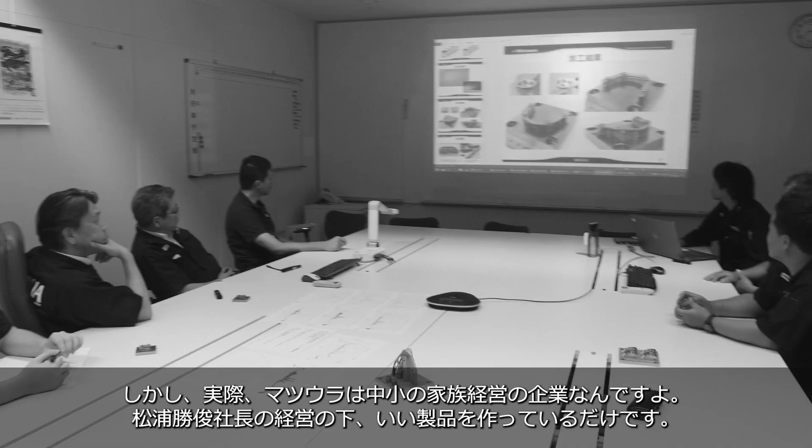We all aspire to have a nice car. Could I afford a 911? Could I afford an Aston Martin? Not wanting to sound arrogant, the Matsuura brand has this image, this market positioning. But the reality is we're a small family-run business by Mr. Matsuura, Katsutoshi Matsuura, that produces a good product. What it means is that people aspire potentially to own a Matsuura. It's quite humbling when a customer buys their first Matsuura and says, 'Never thought I'd ever be able to afford one.' Well, the thought and the true affordability are two different things.

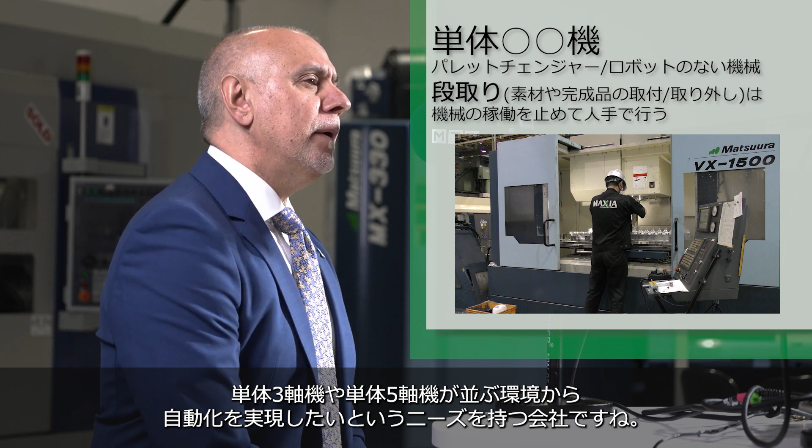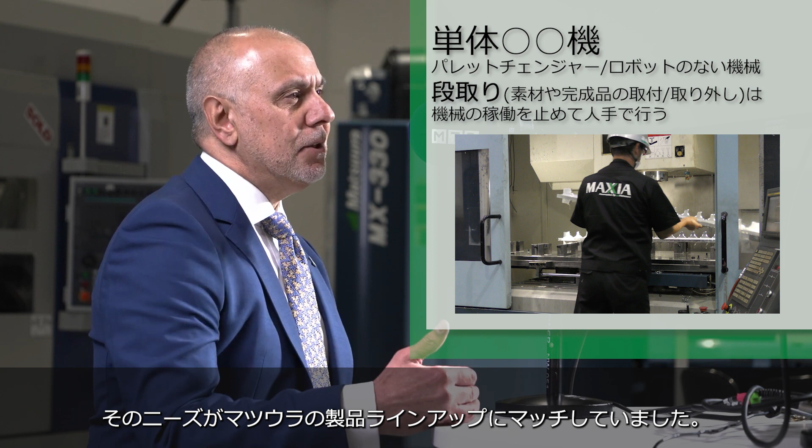I think the reach that you give the market with your platform has reached out to a lot of companies that were probably looking to make that step from the single table VMC, single table 5-axis machine, to automation. And I think the market has sort of played into our portfolio. We're very fortunate, as you well know, our range spans very well from the 330 right through the MX series right through to the MAM. So, the amount of new business...

But the biggest thing that we've seen that's probably been a trend changer is the amount of horizontal machines being purchased again in the UK market. We saw a decline in requirement in the UK, and everything was 5-axis multi-pallet. We've now started to see the need and the sales for multi-pallet horizontals. Maybe I was a bad salesman, but there was no kind of call or popularity for that product when there should be. So maybe that's a good place to start.

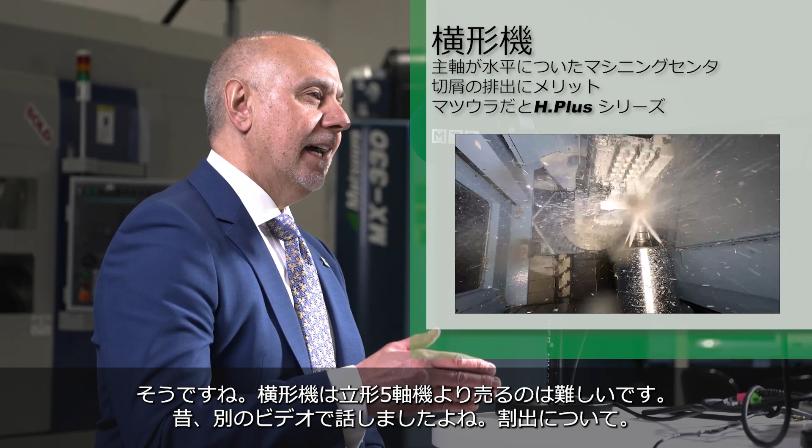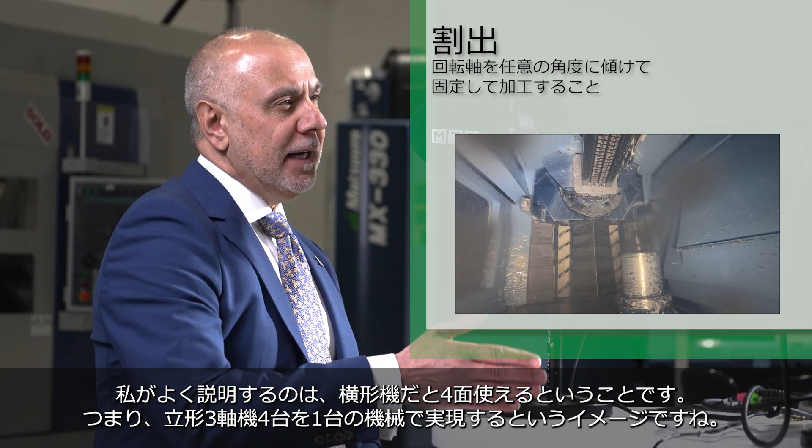The horizontal machining centre is harder to sell than a vertical. Remember that video we did years ago, what's the difference? And I said, tip it over, right? You're laughing now, but it is that. And when you actually explain to people that, say, on one pallet you've got 4 faces, that's actually like 4 verticals in one machine. And then you say, well, on this machine I've got 15 pallets - you've now got all those faces, all those pallets.

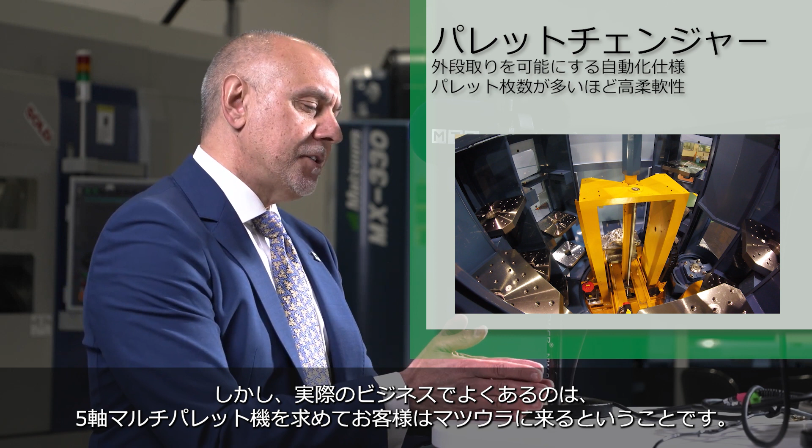What we are seeing, and what we're doing as a business, is that people come to us for a multi-pallet 5-axis, but we actually challenge them - is that the right technical solution for their application? Because it's very easy to say, I want a 5-axis because I can do everything. But is it the right solution that gives the best productive outcome from an engineering standpoint, but also a return on investment? We're very focused on the ROI. So what we've managed to do is, a lot of customers that have come to us for a 5-axis multi-pallet, we've actually changed them to a horizontal - being the right solution, and it's a lot less money. It can be anything from £100,000 to £150,000 less for that application. Well, when you think on an ROI, that's a lot of money back in their pocket.

We actually asked the question on social media a few weeks ago about why companies were continually buying a quantity of vertical machining centres instead of maybe one horizontal machining centre. We were trying to get feedback from the audience, and there were some really good positive points, but there were also a couple that said, well, they're a lot more expensive than a vertical machining centre - which was quite a narrow way of looking at it, because it's not about the ticket price, is it? It's about how long that machine's going to run for, the productivity and the efficiency.

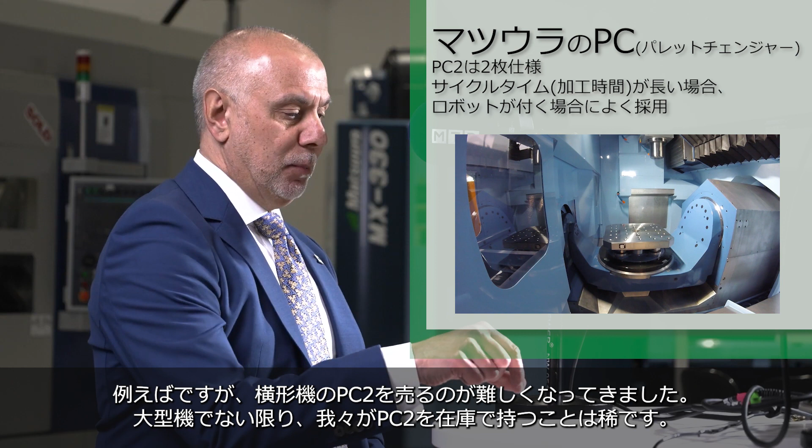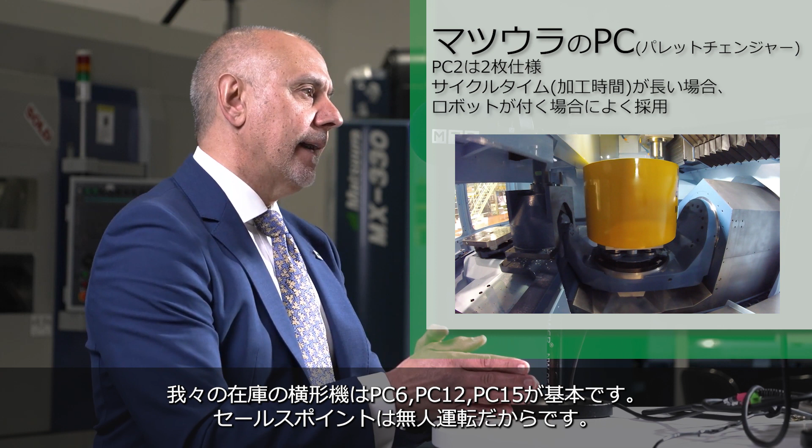Well, I think the thing that's also changed, Paul, is that a twin pallet horizontal is difficult to sell. So let's be clear, I very rarely stock a twin pallet unless it's a large horizontal machining centre. So everything we're stocking horizontal-wise has got 6 pallets, 12 pallets, 15 pallets. Because again, the added value is the unmanned run. So if you can convince somebody that a horizontal is technically the right solution for the application...

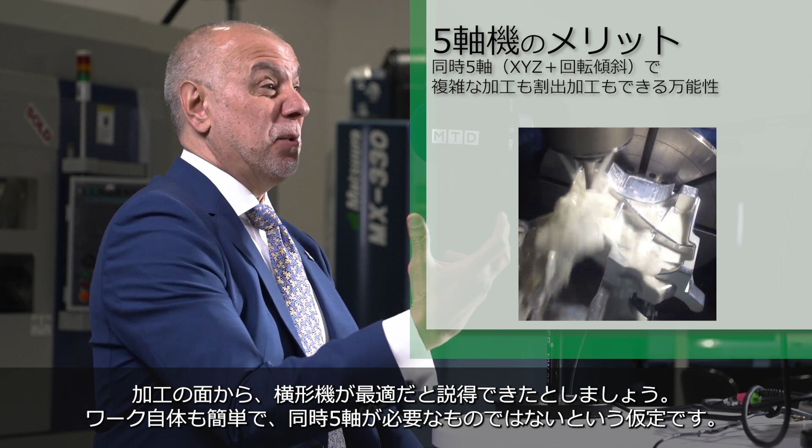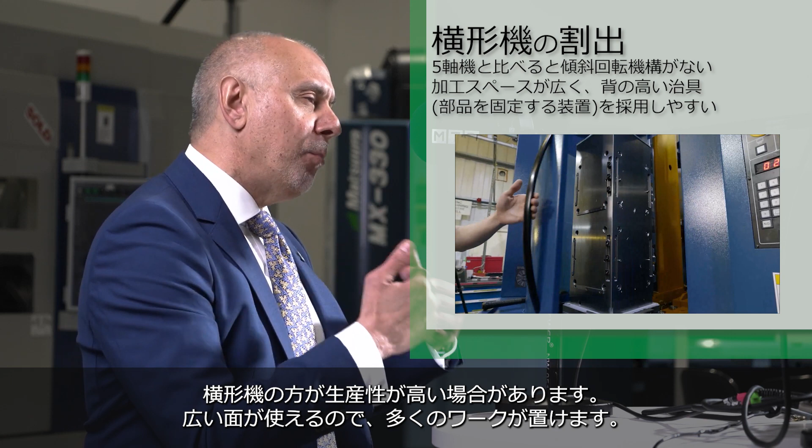It's just a prismatic part, not 5-axis simultaneous. So if you can do it in 2 setups on a 5-axis machine, and you can do it in 2 setups on a horizontal machine, why buy a 5-axis? The argument becomes, well, I want something more flexible for the future. In that instance, buy a 5-axis multi-pallet. But if someone says we've got a contract for 5 or 10 years plus rolling, you ask why buy a row of 5-axis machines when, running them for 5 or 10 years, you can get more productivity out of a horizontal, because you've got a larger face, you can put more parts on, and the chip-to-chip time per part comes down. It's all the technical arguments.

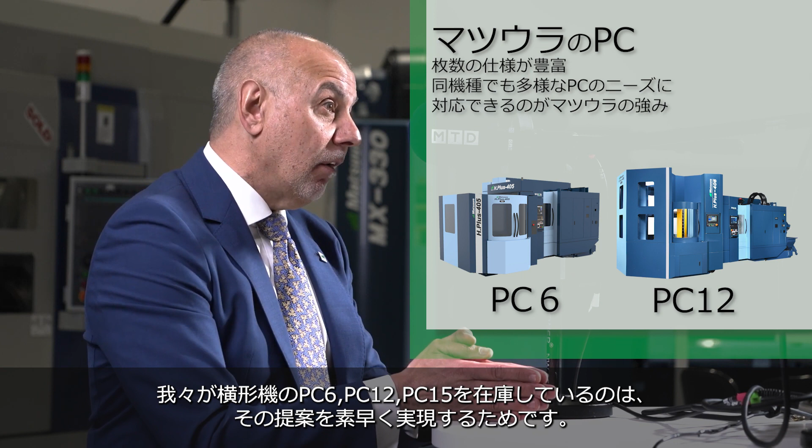But the fact that we stock 6-pallet, 12-pallet, 15-pallet horizontals in stock means we can give that solution quite quickly. The horizontal machining centre - what is the smallest company you've put one of those into?

Because you've got people watching and listening who might have a vision of horizontals being a big row of them - it's our shared friend, Matt Jeunesse. He is probably the smallest engineering business, and to put that vision across on camera here, his machine probably occupies maybe a third of his machine shop, or maybe a quarter. Yeah, I would say so.

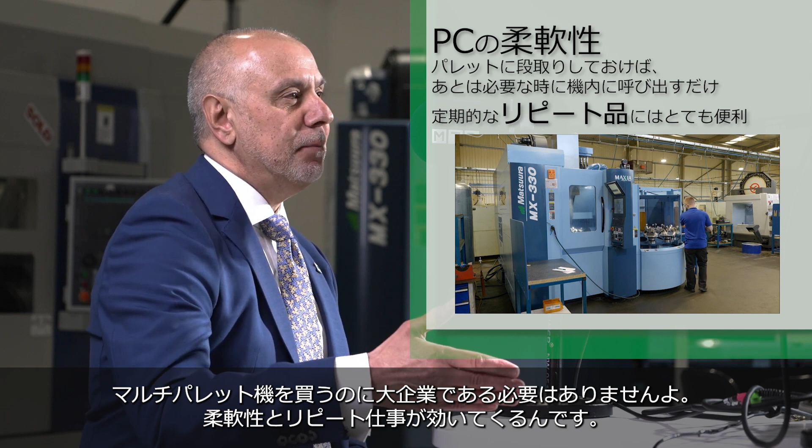And he employs, well, he's your mate as much as mine, but he employs a handful of people, and that machine runs night and day. So I think you don't have to be a large company to buy a multi-pallet horizontal. It's all about the flexibility, the repeat.

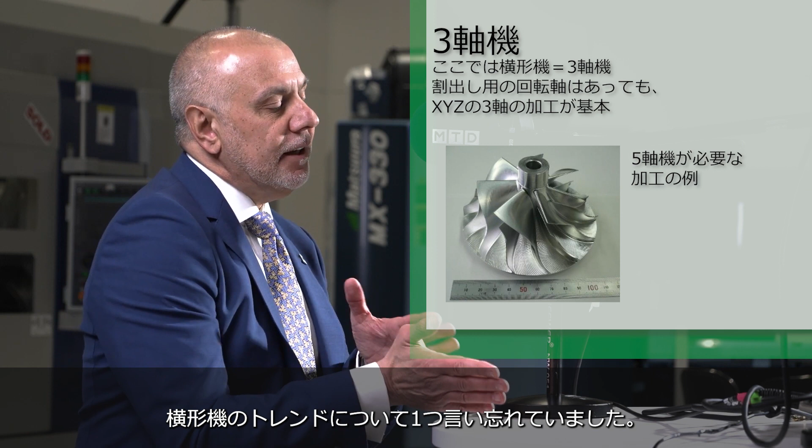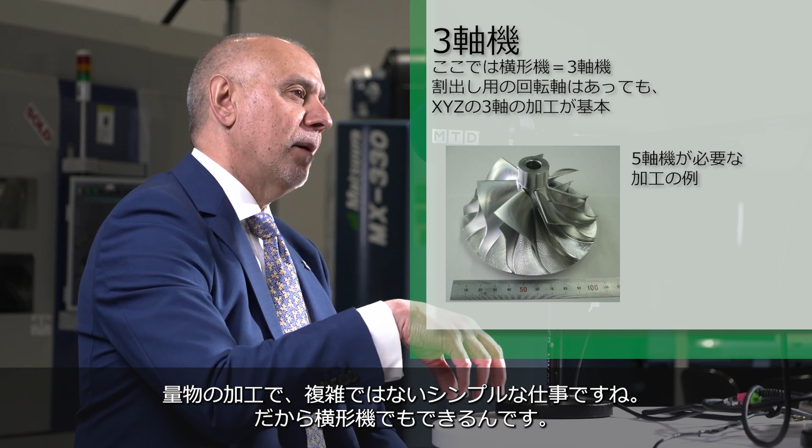But if you've got batches that repeat on a weekly, bi-weekly, monthly, bi-monthly call-off, that's why we sell a multi-pallet machine. But if you don't need it to be 5-axis, a horizontal will do. I think generally the other thing influencing it - one thing I've missed - is there's more volume coming back to the UK. We've seen onshoring over the last 2 to 3 years of more volume components coming back that are generally simpler to manufacture, so you put them on a horizontal.

Are you definitely seeing that? Yes. It's interesting to hear, because I've been in a few machine shops where I've heard that, but from a supplier's perspective, selling machinery into the market, there is now a demand and work coming back from overseas for higher volume components. 100%. Really? Yeah, we're seeing that.

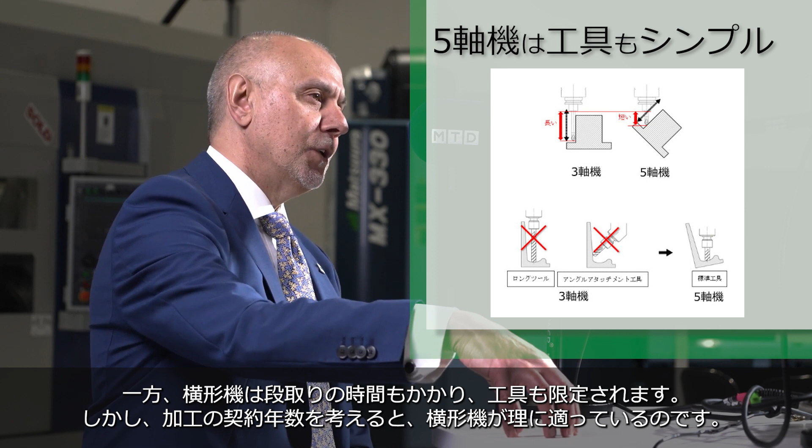And I think that's what's influencing the horizontal growth, because people are getting volume. People always say, if I buy a 5-axis multi-pallet, I've got total flexibility - I can do volume, I can do variety, I can make one. Horizontals take longer to set up, the tooling's more complex, more expensive. So if people are getting longevity of orders, that makes their decision-making process easier.

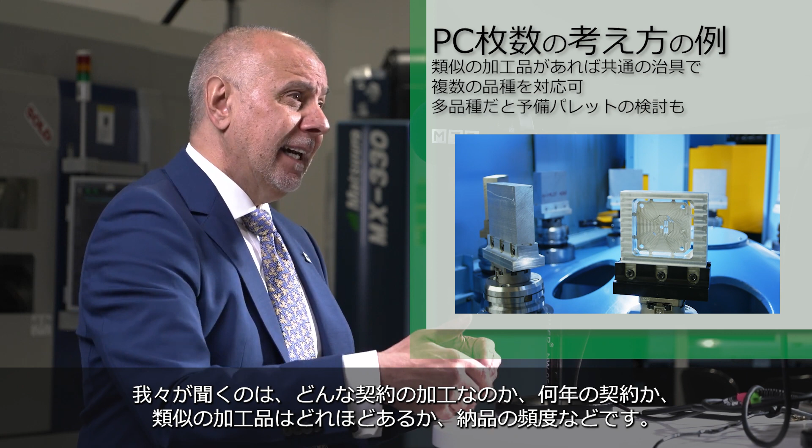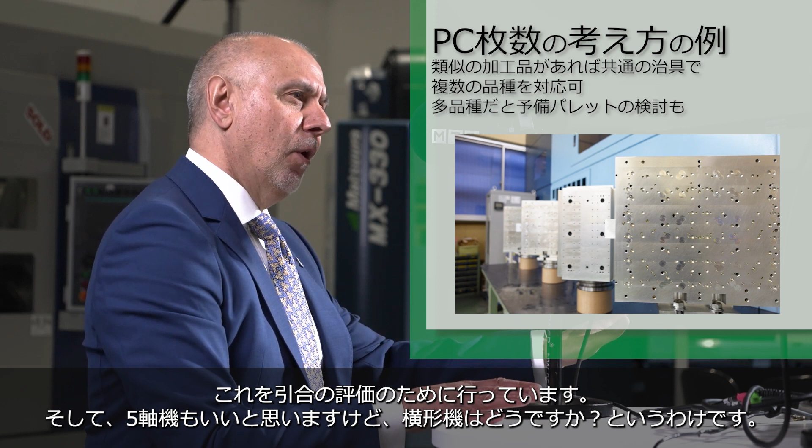So we don't go into saying you need to buy a horizontal. What we say is, what's your contract? What's the life of this product? How many parts in the family? What's your frequency of delivery? We do that as part of our sales evaluation process. And then you go, well, the 5-axis will do the job, but have you ever considered the horizontal? So it switches from that standpoint, because we saw a growing need in the UK.

Roger and I took the decision to stock more horizontals. We've never stocked 12-pallet 405s before. We're selling them - these carry a price tag of £500,000 plus. People are buying them, it's not as if they're sitting here. We're buying them off plan - before they even arrive, they're sold. So there is a need.

And it needs to be calculated. It sounds like a growing need, which is good to hear.

I mean, we came into this podcast, and one of the things we were going to talk about now, which I thought we'd start with, was some of the new products you've got and the success in those areas. Yet we've spent 10 minutes talking about an existing product that you've had in your portfolio for decades, which is still growing as well.

So that's kind of where it all started, isn't it, for Matsuura, in a lot of ways? Well, it did. The journey of automation started with the MAM72. If we go back over 30 years ago, that machine was manufactured - the Generation 1 model was called the MAM72 S40.

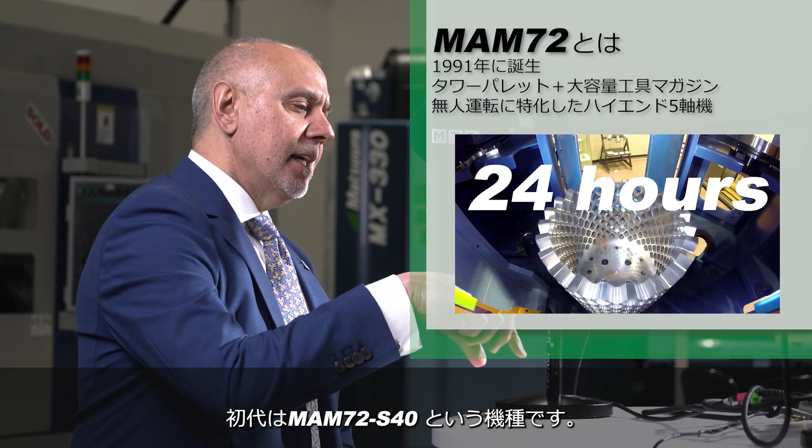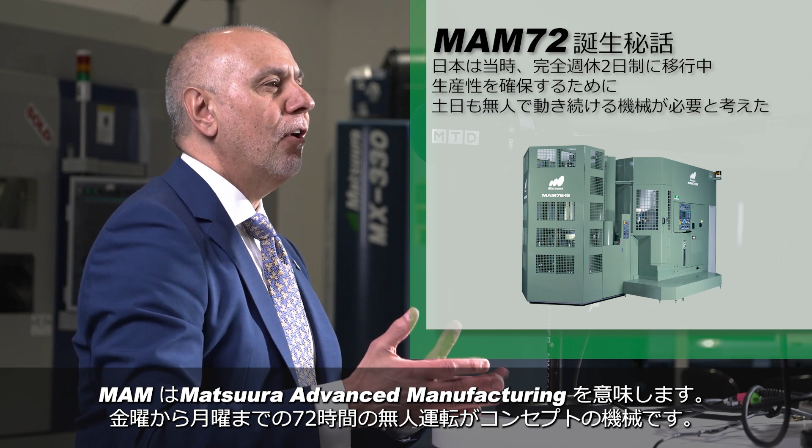Okay, that machine was ahead of the market. It was created by the brother of Masanori Matsuura, our old president, Katsu's father. It was the MAM 72, Matsuura Advanced Manufacturing, 72 hours unmanned running, Friday to Monday. Unheard of 30 odd years ago.

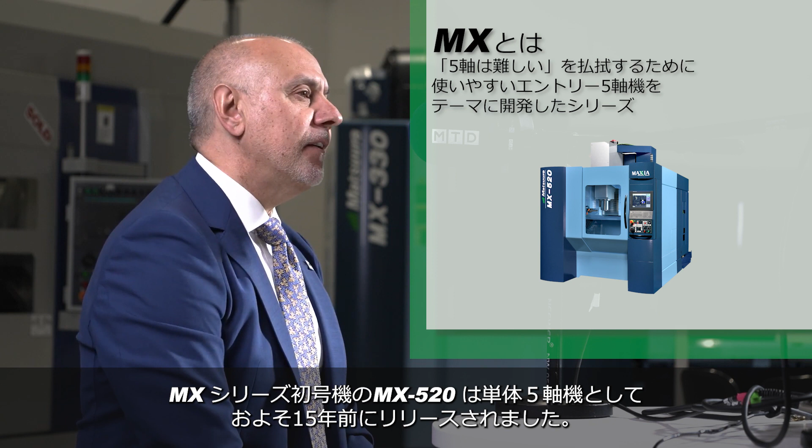But that concept has remained, right? So from that one machine, we've spawned off the multi-pallet tower system on the horizontals. The whole MAM range has got multi-pallets, whether it's a 35V, 42V, 52V, 63V, 70V, dare I go on. And then obviously we had the MX, the MX 520 as a single table 5-axis, introduced probably 15 years ago, brought into the market to give a Matsuura offering on a single table 5-axis. They're all multi-pallet now. The whole MX range has got its own multi-pallet suite and a number of tools.

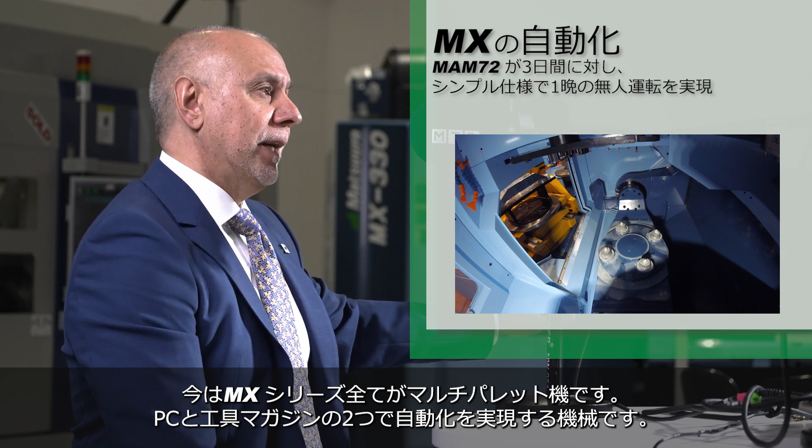This is where I've witnessed personally the acceleration of your market share in those small to medium-sized companies that may go from a single table machine up to a pallet system. What's led them down this path in the last few years? We see one behind us here, the MX330, which has been incredibly successful. What's led them in that direction?

Well, before we started the podcast we had a chat. I've been here a little while, 30 odd years now. Plus. You don't look like it.

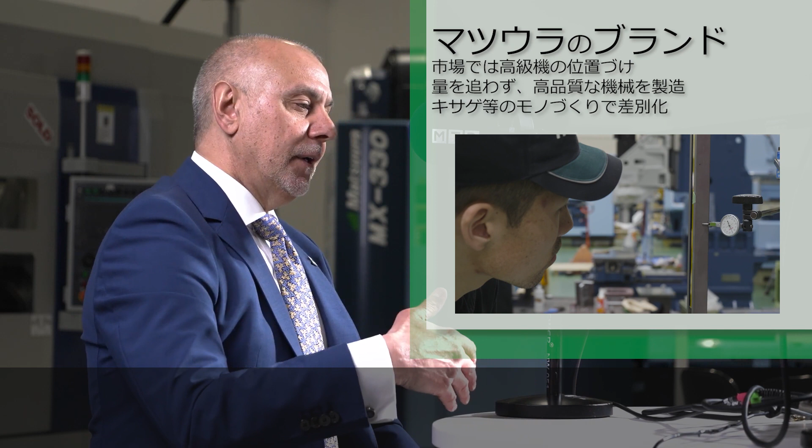Yeah, maybe not. Anyway, I think if you look at the MAM 72, I always use the cliche of a car. We all aspire to have a nice car. Could I afford a 911? Could I afford an Aston Martin? Not wanting to sound arrogant, the Matsuura brand has this per se, this image, this market sort of positioning.

But the reality is that we're a small family-run business by Mr. Matsuura, Katsutoshi Matsuura, that produces a good product. So the brand is bigger than the size of the company. I always put that out. As a global manufacturer, Matsuura produces far fewer machines than people think, and I'm not going to mention it on the podcast because that's something I'd like to keep to ourselves. But what it means is that people aspire potentially to own a Matsuura.

It's quite humbling when a customer buys their first Matsuura and they say to us, 'Never thought I'd ever be able to afford one.' Well, the thought and the true affordability are two different things. The fact that the investment returns, it's multi-pallet, it obviously runs unmanned. If you can produce parts day and night, unattended, reliably, you generate a big income.

That income then is your affordability. So we always say to a customer, if you could afford to spend X per month on an investment without winning another order today, can you afford X? And 9 times out of 10, Paul, the answer is yes, they do. So people don't realise they've actually got the affordability to buy one of these machines.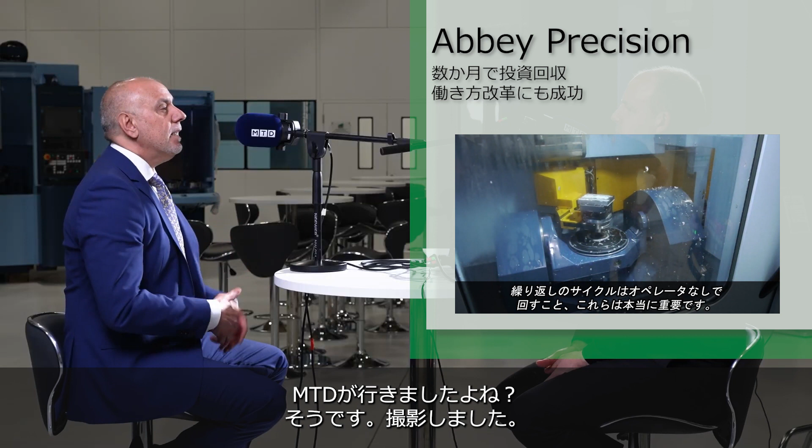So Steve was great because they had a lot of verticals, VMCs, I think the odd single table 5-axis, but they wanted to go into automation. For years I knew of that business, for years I tried with previous owners, to be fair, when it was owned by other people. And yet he bought one and very quickly has ordered 4. So, and that was from nowhere, and that's just one example.

We've got many a customer, R&G, Enzo, old Matsuura user, really wanted to change his business direction - the workholding, the flexibility to change from one job to another and always keep the spindle running.

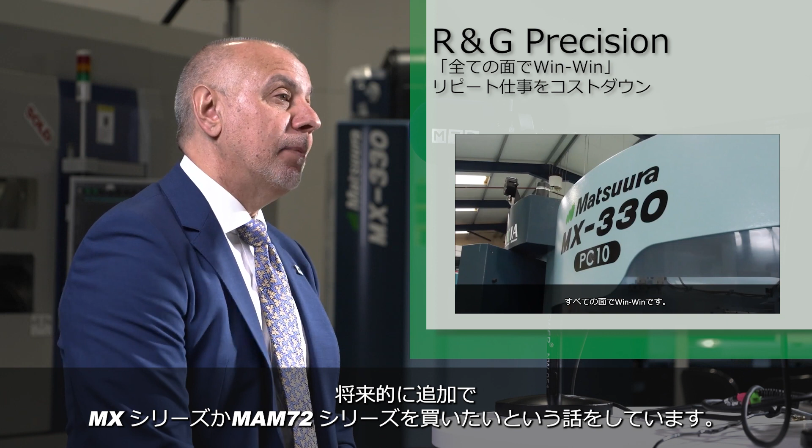Now R&G, another one, he's bought 2 MX330s. He's talking about maybe buying more MXs in the future, or hopefully a MAM72. There's just 2 examples. I think one that's actually not my customer, but our customer, Cinch.

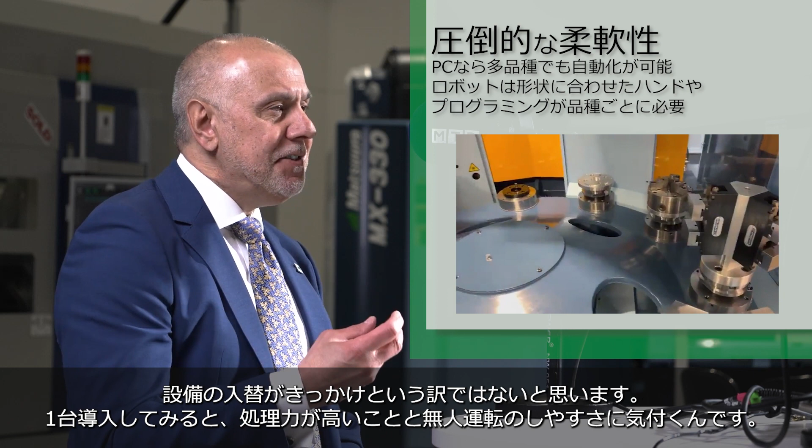We've just delivered another 2 MX330s. They've now got 3 in a space of 2-3 years, and this is common. What's the common thread in all of these? Is it replacing fixed vertical machining centres? What's the demand and what's the sweet spot making that a success for you? I think people aren't necessarily replacing the machines to start with, but what they realise is when they put one in, how quickly it eats the work and how easy it is to get the machine running unattended, regardless of volumes. Yeah, and it becomes a very quick batching machine as well.

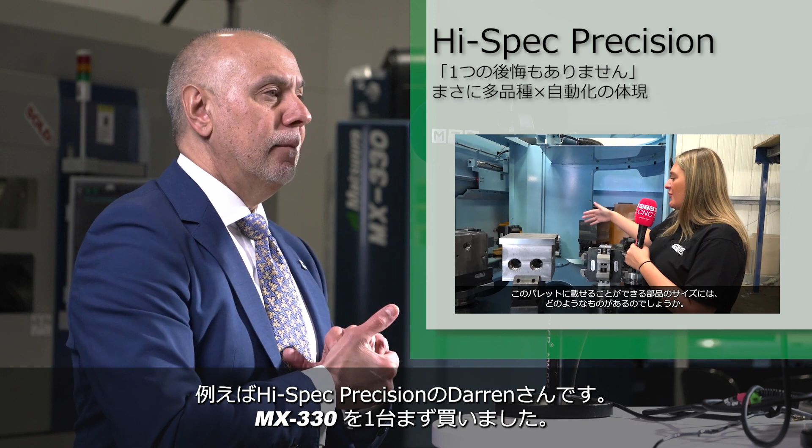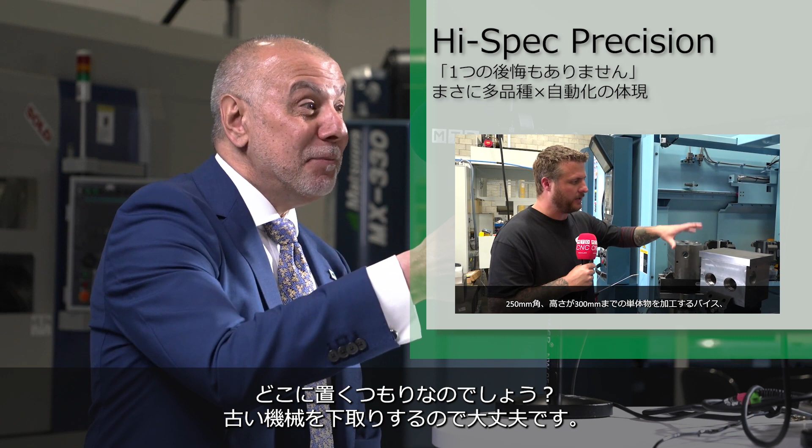So here's another one, Hi-Spec. Darren bought one, and he was putting it out on LinkedIn saying it won't be long before I buy another one. I knocked on the door and he'd bought another one, so we're delivering that very soon. Where's he going to put it? We're actually taking some old machines out. So he's seen the return on that investment, and within less than 12 months he's bought a second machine and taken 2 tired machines out.

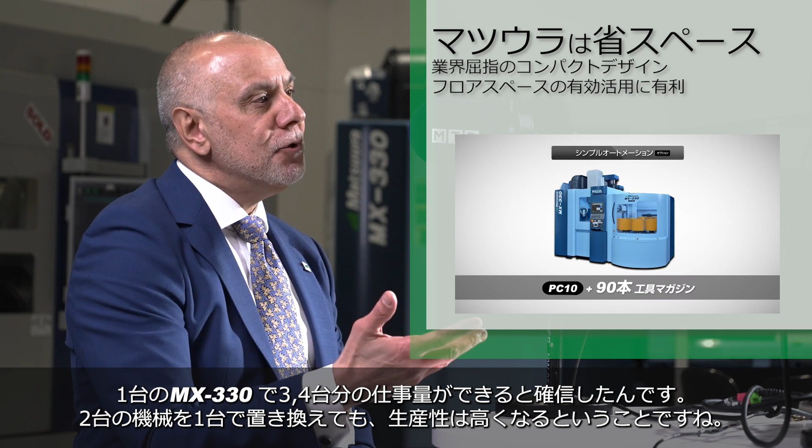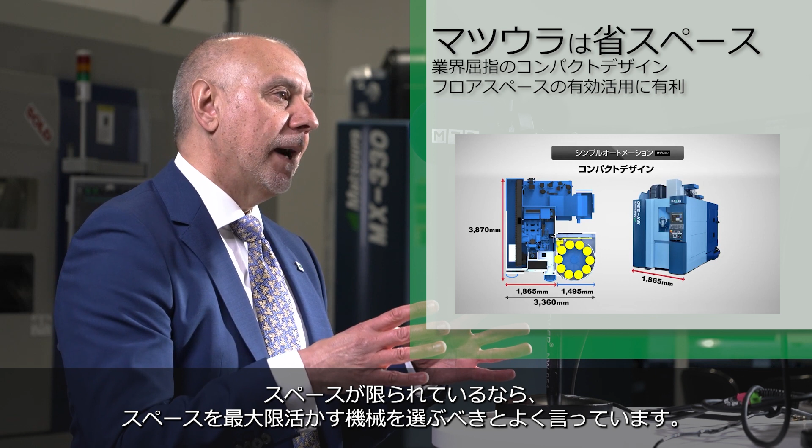One is a 5-axis single table, and one's a vertical. But he knows one machine will do the work of 3 or 4 machines. So although he's replacing 2 with 1, he's actually going to get more capacity. And the way I always say it, if you're tight on floor space, your footprint will work much better for you as a return.

And then you've got the MX850 now, which you've added the pallet stations to. Once again, to set the scene, the 850 is a much bigger 5-axis machine, isn't it? It's 850 diameter by 450 high. So are we now saying the need for automation is extended across industry, even to these much larger and heavier components?

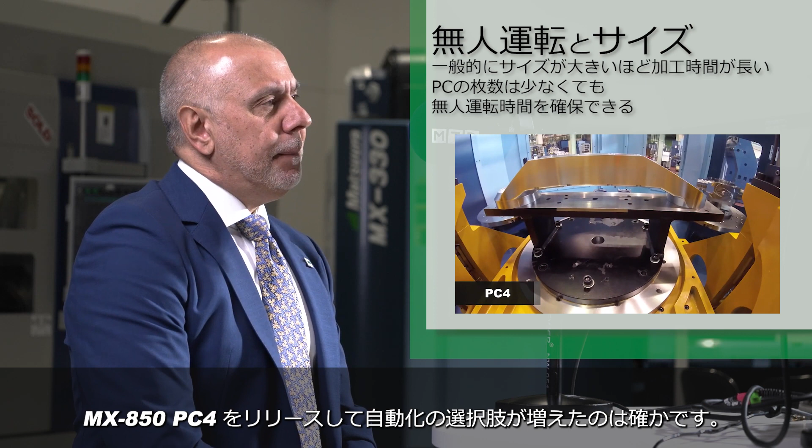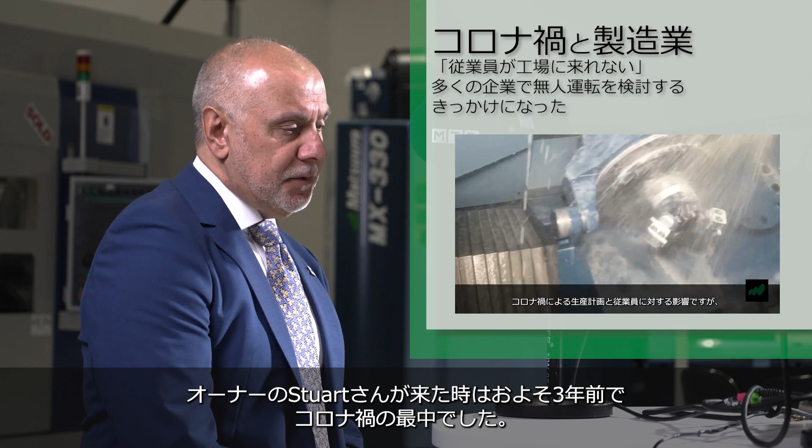It is. The MX850 was slow on the uptake. The 850 single table we've done quite well with, lots of customers bought those. But the 850 PC4 all of a sudden gave opportunity to much larger workpieces. There's one customer in particular, Swiftal, just a little bit north of where we are. Stuart came in here about 3 years ago during COVID and said, Dom, I need to change the way I manufacture and put work through my workshop. I'm currently using a lot of single table 5-axis machines - I'm not going to mention the brand, but that's where they work.

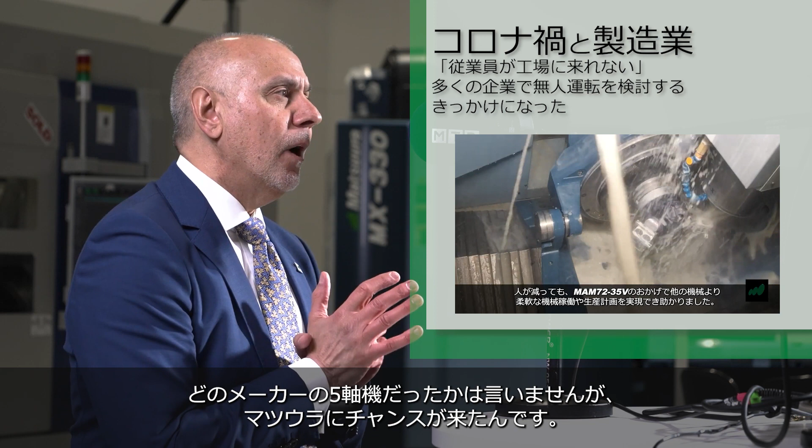It wasn't Matsuura. So we started talking, and he stood in front of all the machines in the showroom where we are now, and said the 850 fits his work portfolio. He does a lot of oil and gas, exotic machining of components, quite robust. The 850 gives you 15,000 RPM, but also a very high torque spindle motor, so for machining those exotic materials it worked quite well. We put the first one in, very quickly followed by a second. Last year we put a third, and I'm not going to tempt fate, but we're talking about more right now as we speak. So again, from 0 to 3, maybe 4 or 5.

Is this without the pallet? With pallet changer, this is with pallet changer. It's the pallet changer that's made the difference, because he went from single table 5-axis machines of the same size, another manufacturer, but the same size machine. What they were experiencing was obviously long changeover times. The other model had a small tool magazine, so we offer more tools, pallets, and we've also done a bit with tool ID for changing tools quickly. So the changeover time from one job to the next is very quick. It doesn't necessarily mean he leaves the machine running unmanned, but for Stuart it was more about the changeover from one component type to another to get the utilisation up on the machine.

If people need help, to be fair, we always say now, I haven't got to teach you to program - CNC's been around for so long.

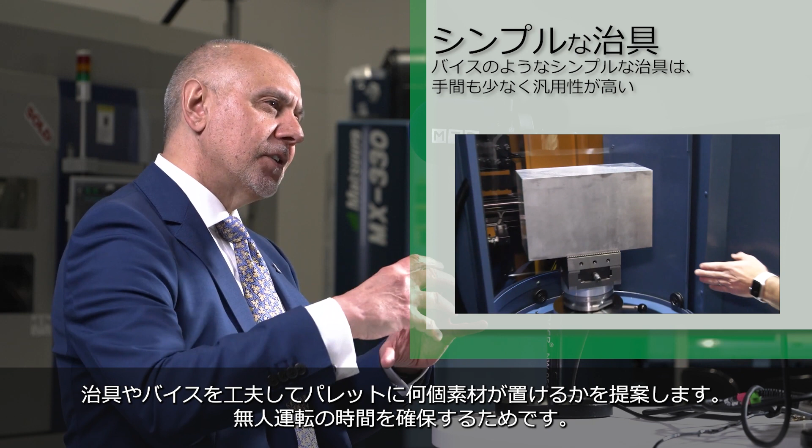What we do is steer how to best utilise the unmanned bit. So from a point of view of work holding, how many parts they can put on, or looking at different work holding solutions so that they can get the unmanned run.

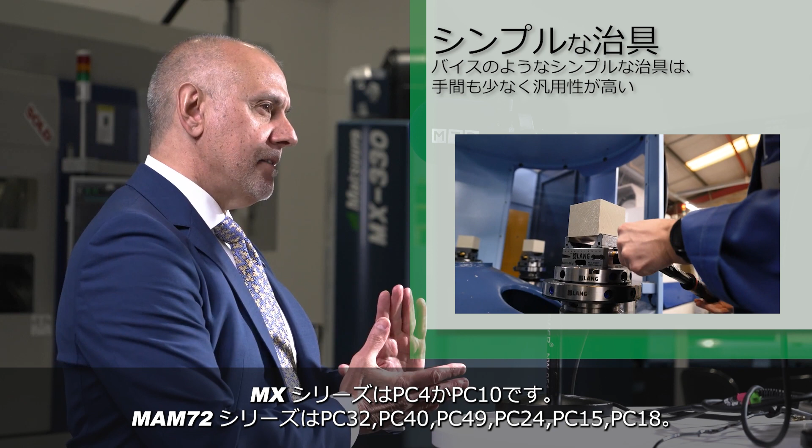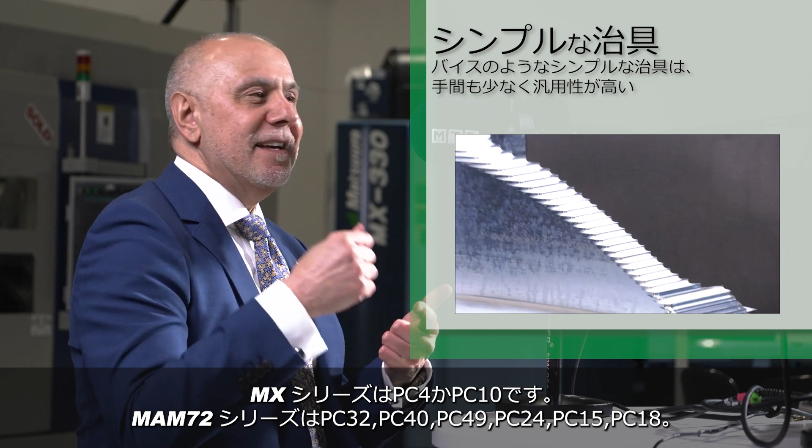We always say the thing with the MX range is it's not like the MAM. The MX is 4 pallets or 10 pallets. The MAM 72, we can do 32 pallets, 40, 49, 24, 15, 18 - a lot more pallets. So your work holding doesn't need to be as complex. But when you put the MX behind us, that's 10 pallets, 90 tools, your work holding needs to be a little bit more out of the box.

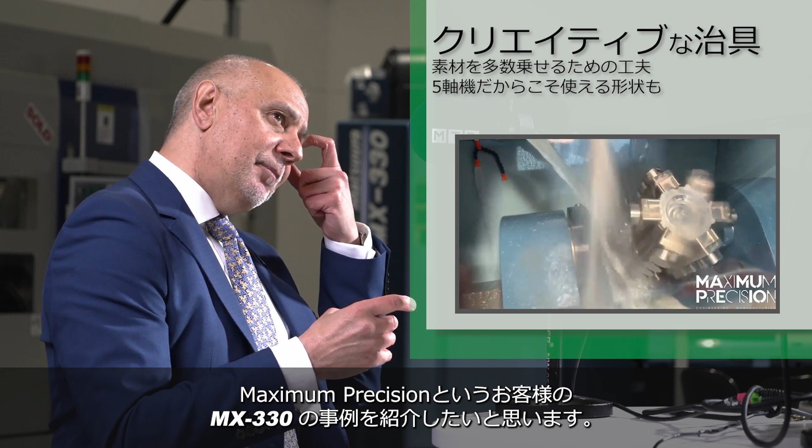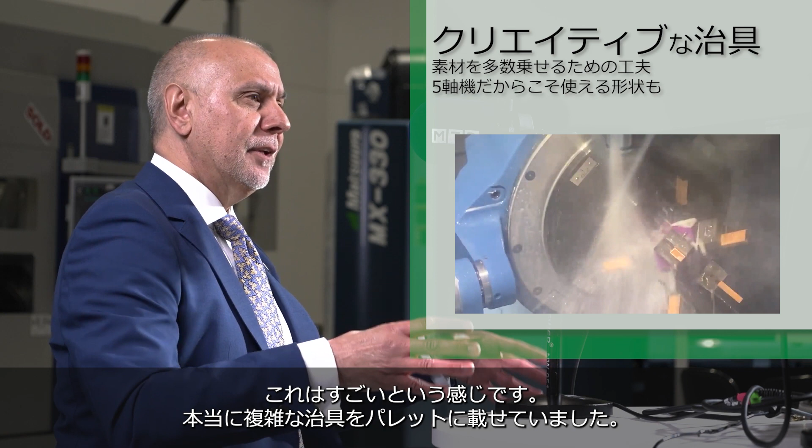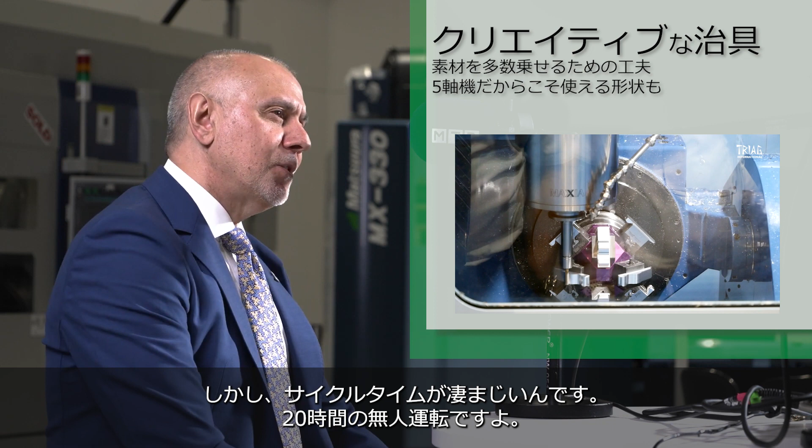That's what I've been seeing on my journeys. I went to Maximum Precision on Friday, bought an MX330. Wow, what a job they've done with their work holding - they've put these complicated cubes on this little machine to get more parts up. The guy said it takes a long time to get it set and run compared to just putting one job in a vise on a 5-axis vise, but the cycle time they're getting off these machines, they're running 20 hours unmanned.

I think what people have done with the MX330 PC10 in particular, not just in the UK but globally, people have really grabbed onto - let's get as much work on these little pallets as we can and leave that spindle running. Honestly, some of the stuff I'm seeing out on the road, it's brilliant.

It's small OEMs. Small OEM, 100%. Would that represent the whole pie, do you think, or the majority? Because if you look at the last 3 years, aerospace - very little business. We don't do a lot in the UK with medical or direct. Oil and gas, a little bit, but not a lot. Motorsport's a big contributor to our business, but again it's been quiet for the last few years.

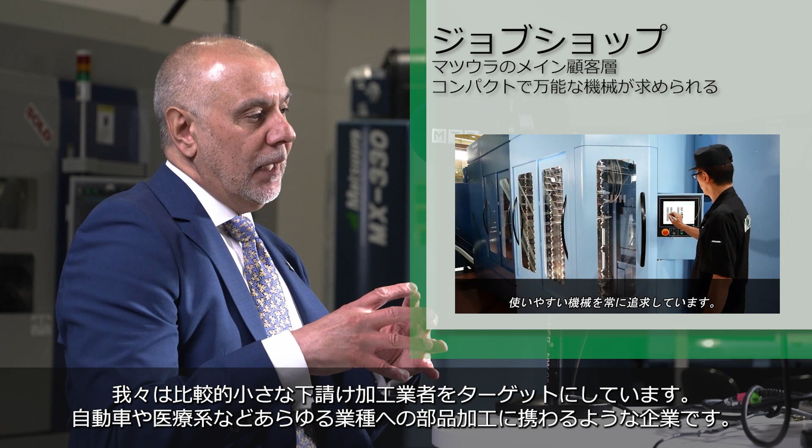Now if I look at the small OEM that does all sorts of industries, they might be in aerospace and motorsport and medical, but they're subcontractors. So rather than it being an OEM, as Mr. Matsuura would say, it's a job shop. We sell to the job shop, the subcontractor. The subcontract market for us definitely is what's kept us alive throughout COVID, 100%, and it's what's been our growth in the last 2 years, 100%.

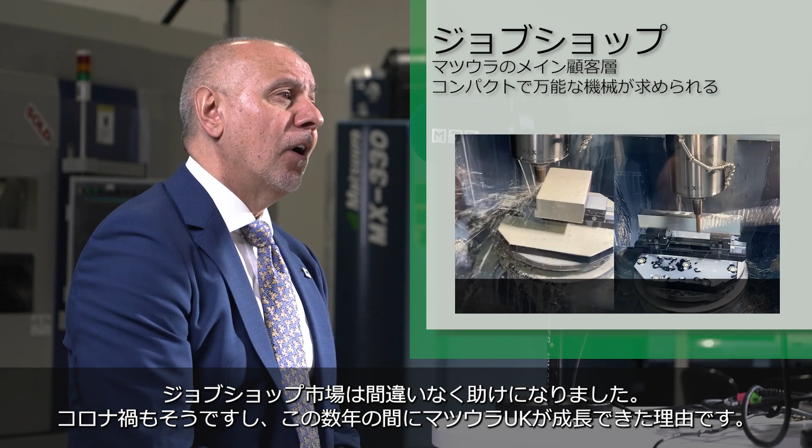Dominic, you've had some changes in the business recently as well, which I'm sure you can publicly talk about - you've always been a great face for Matsuura, but now in a more senior role. Well thank you, yes, so in January of this year I was promoted to sales director and a board member of Matsuura UK. So yeah, really good.

Congratulations to you. Now my last question: that machine's blue, your jacket's blue - are you going to paint the Muratecs blue? No, Muratecs are staying white, mate. No, 100%. But cut me in half, it's a little bit of blue blood.

And the next year ahead, you can't see much change other than this automation, continuation of machine sales in these areas. I think automation is the future. I think anybody that is looking to invest in machinery, or isn't at the moment, should be looking at automation, because I think to stay ahead of the game and stay ahead of competitors - you know, we're selling automation to very small companies now that 10 years ago you wouldn't have even spoken to. And they're buying, and they're not just buying one, they're buying multiples of machines.

That's probably a message for people listening to this - that maybe if they are a small business and thinking it isn't for them, it's unaffordable, it's not the right product, they haven't got enough space - I'm sure you can answer those questions. I always say, and I've said it for years in all the videos we've done over time, a Matsuura is more affordable than you think, but obviously you need the right ingredients. Talk to us, let's see if the recipe is right, and we'll do business.